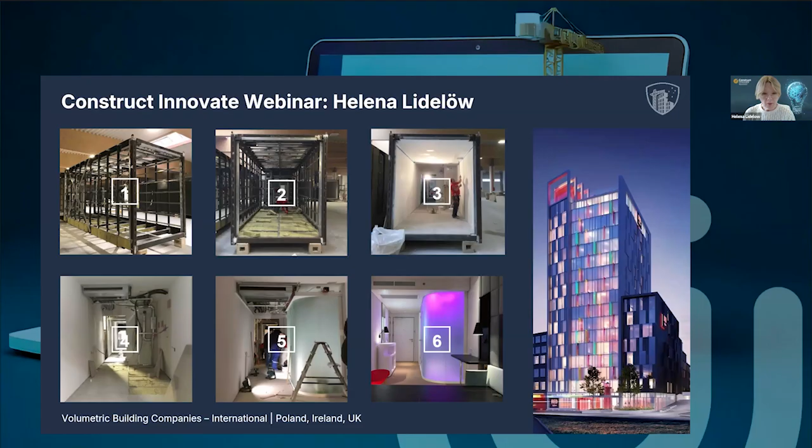Now, what we need to do here is to talk about how we move from our traditional way of thinking about construction and what challenges that poses for us.

So the first difference here is how we look at delivery. So we insert this factory piece into the equation and the delivery chain, and that does change the way you need to look at the supply chain from various standpoints.

So the first thing is that with modular approach and methods, you will have 40 to 50% faster site works. So that is glorious for most people because they want their project to arrive fast. But finances are the ones who struggle with this concept, given that you are producing a lot in a factory, but you're actually not producing that much on site. So where is the collateral? That is one of the biggest challenges we are discussing when we're closing projects.

On the client side, you get your building quicker, which means your return on investment here, depending on if you're hospitality, you get guests in your rooms quicker. If you are doing rental property, you get inhabitants coming into your building and starting paying rent quicker. So that means something on your balance sheet in the investment here. And that's one of the biggest arguments for modular: we're not selling cheaper, we're selling faster.

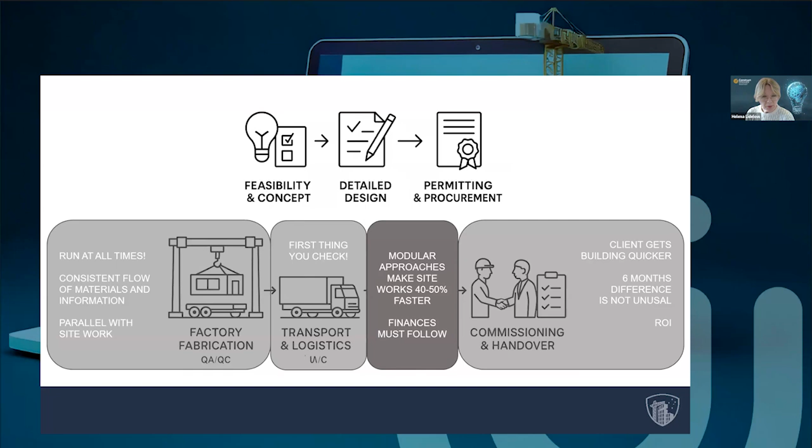Now, I have factories, two of them, and this is one of my pain points. I want it running at all times. The largest investment for a supplier is the factory itself, and if I can't feed it, that investment won't pay off. So sometimes when I speak to clients, I don't speak about one project - I speak about a series of projects so I can load my factory for a consistent flow.

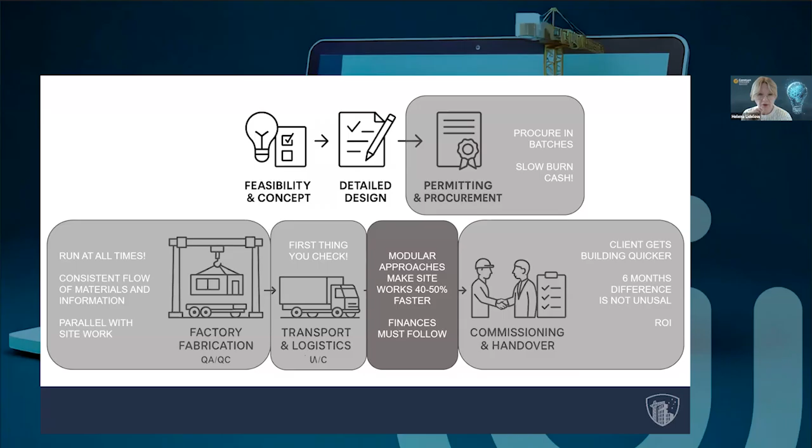For procurement, we don't want to overspend on the cash flow here. So we're procuring in batches and a slow cash burn throughout the project. This is something we have to align with our contracts and our clients.

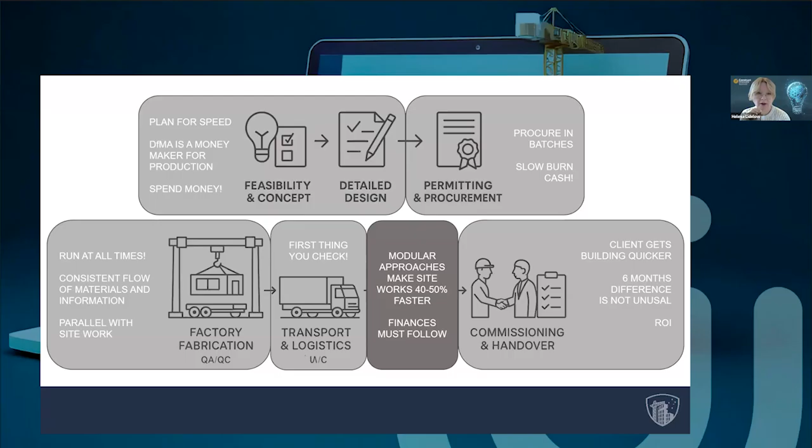And then the piece that's dear to my heart - I used to be a design manager before - the more time and effort you spend in design, the better all the rest downstream flows. So if there's anywhere in the process where you as an investor, or me as a supplier, should spend time and money, it's in that design process. An error propagates all the way through, and that's nothing we want to pay for.

If you're a client now and on this call, how can you prepare for engaging in the modular contract? Well, first of all, you need to understand the cash flow I just projected. We will take you through that discussion.

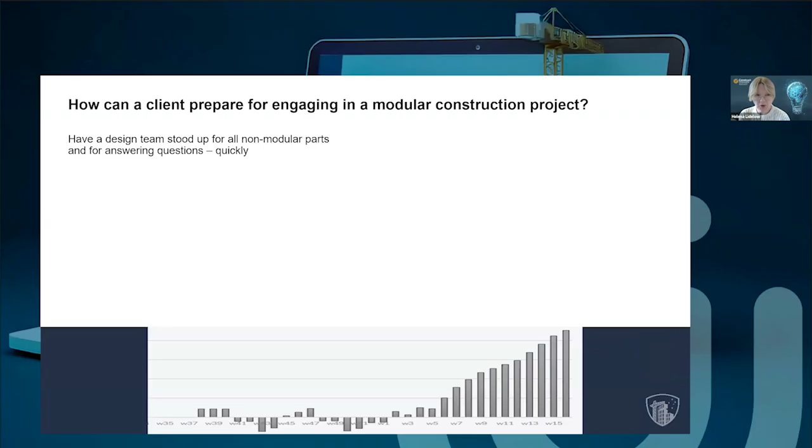You, on your side, as a client, will need to have a design team too, because modular is not the answer for everything. We typically don't do foundation works and roofs and so forth. So there are bits and pieces that need to be designed outside of the modular parts as well.

If you want this to go smoothly, you repeat yourselves as much as possible. Some people think that's boring. Some people think that's really efficient.

Let's have the discussion. The large ticket items for you will be the transportation and the site process. If it changes - if there are access problems or if you move the timeline - that's going to affect everything here.

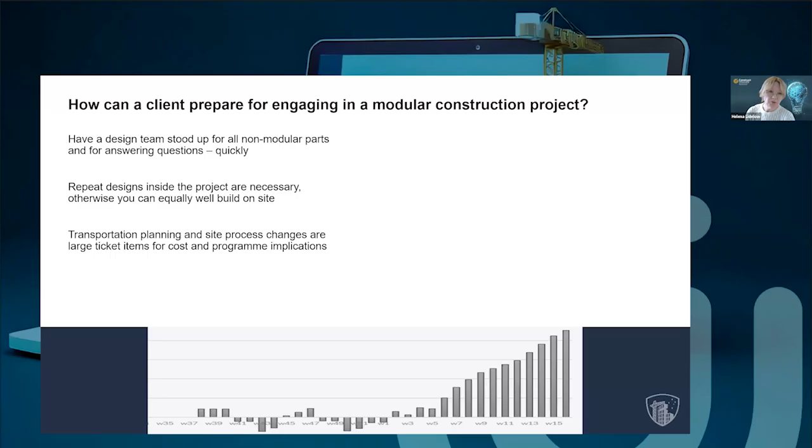Control of these and certainty around these will help you produce a modular project. Your 75% of your project can be tied up in the modular portion of it. This is a lot - so you're placing a lot of your budget in the hands of one supplier.

So we spend a fair bit of time discussing client-supplier relations and how we can ensure collateral for this.

Now, don't change your mind. During the project, you do not change your mind. You do not walk into the factory floor and say, I want to move the door. That's way behind on schedule, and the follow-on effect of you saying that is that I probably have to change out 200 modules now and move the door.

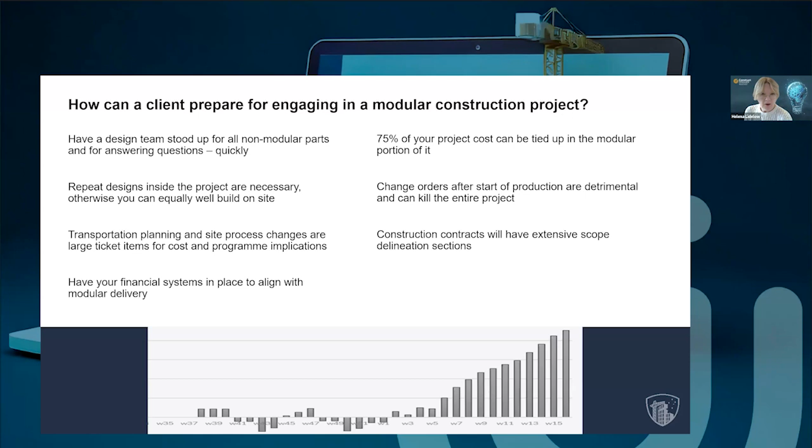So that will be a hard no, and that's why you should spend so much time upfront in design - it's for you to be sure that you're getting what you want. Now, this one on collateral we already discussed. Let me move on, because I have a tendency to talk way too much. It doesn't make sense all the time.

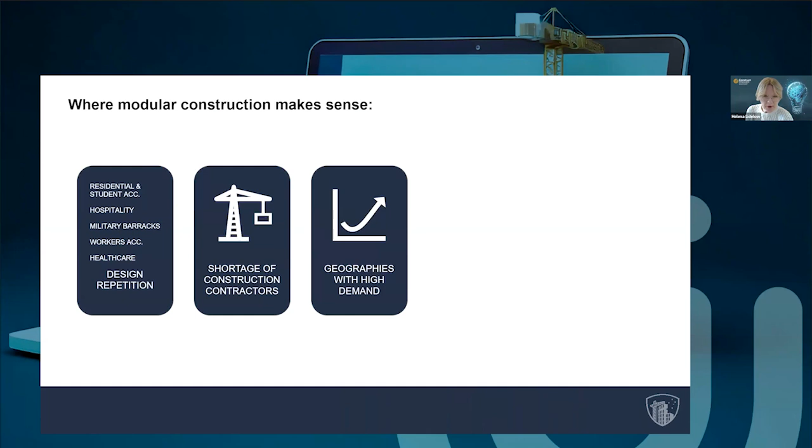So if we're looking at this from a sustainability standpoint, which we should for this seminar, this is not a one-size-fits-all solution, by no means. You should be looking for design repetition. You should be looking for areas where there are shortages of construction contractors, meaning you don't have much domestic supply. You should look at geographies with high demand, and you should look at where you have high labor rates. Labor rates in Poland are not as high as they are in other parts of Europe, so I have a delta there that I'm working with.

That's why we're here. And then locations with little supply overall. I have a fair amount of islands in my pipeline - islands in the Caribbean. I just told you Iceland. I have projects in Ireland as well, and we're working on islands outside the coast of Africa. They are perfect petri dishes for all that you see here on the screen.

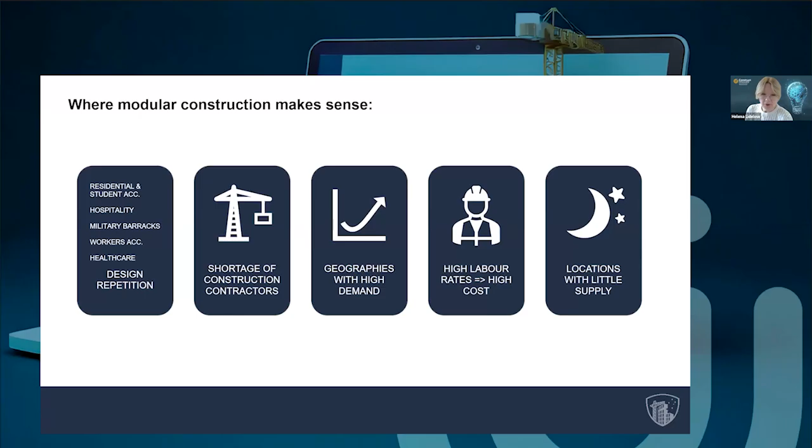But there are also countries who sign up for one or more of these conditions.

This is a question many ask: will modular construction become the norm in the future? Some people say everything should be modular. I've been in this industry for 25 years. I will say that's probably very unlikely that you're going to end up with that.

Modular construction has limitations. Not all construction designs can be modularized or should be modularized. From a sustainable society perspective, why would we want to do that? We also want concert halls, and we also want open spaces for schools and arenas. You don't want to modularize everything you see, but there are those structures that do make sense, and let's look at them.

Not everyone can invest in a factory either, and not everyone should, given the technology that we need to use them. Infrastructure as a sector - that's a large sector where it doesn't really work all that well with modular solutions, even though there are exceptions.

And we live in a world where 50% of everything that's done in Europe in construction is actually refurb, which means that's another challenge when you have to walk into existing structures and start work.

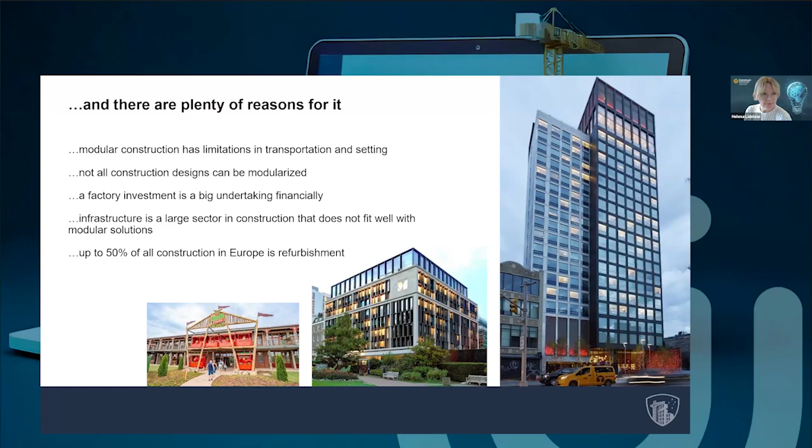Then we have the pros. What are the pushes for a modular solution?

Well, construction workers are not at hand and they are not increasing as a group worldwide. Digitalization will remove work tasks that used to depend on manual labor, but it also forces a good amount of definition into modular.

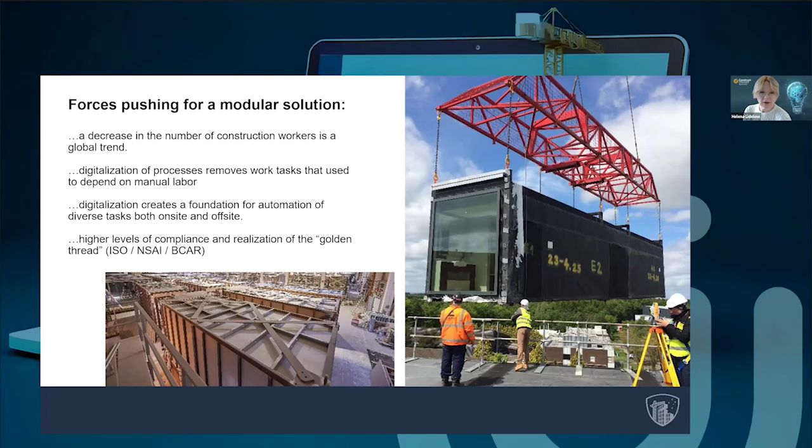The higher levels of compliance and realization of that golden thread sit really well with modular. The reason is that I, as a modular supplier, need to keep track of everything to make sure it ends up in the right place. And that happens to align very directly with what is said in standards like ISO 9001, for which I'm certified. That provides a lot of certainty for clients coming in to understand that I need that delivery system as much as they do.

There are, of course, some tricks of the trade, so let me share. And some of them are backwards. Spend that time in design. Don't rush, just don't do it. You have that money, it isn't all that much if you start looking at the overall project here. Make sure that you have the proper resources and the proper expertise in design.

Let's do a feasibility study. We offer this regularly to our clients, and make sure that the suppliers are telling you if this can get done and if it can be rejigged to a modular construction approach.

This one I would love for everyone to do: bring your insurance company and your bank with you early. Many project discussions have ended up with a no on certain details here, and you may have spent so much time and effort into the project that you're actually really disappointed when you end up with a no from these heavy institutions that need to back you and your project.

And then spend time on coordination here. We have wonderful BIM tools today, we have wonderful BIM managers today. We understand how to use digital technology to work with each other, and modular is one place where that pays off heavily. An error multiplies here, so let's make sure that we don't have them and that we see them early.

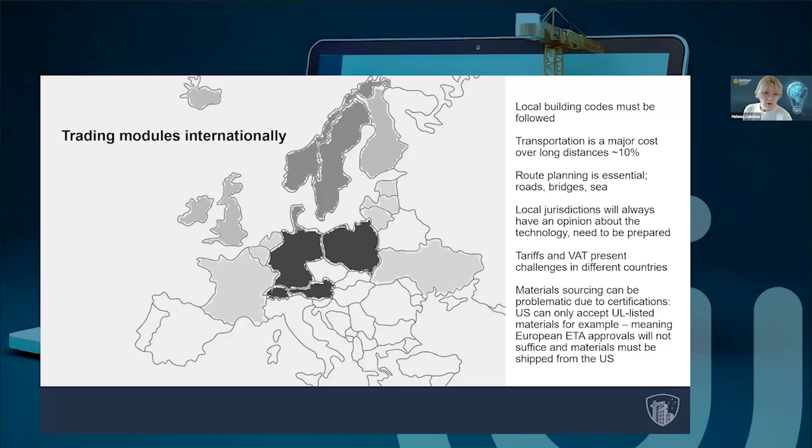Isn't it super counterproductive now to ship modules from a sustainability standpoint? This is one of the questions I get almost every project. You're just shipping air, doesn't make sense. So we have then made analysis on that.

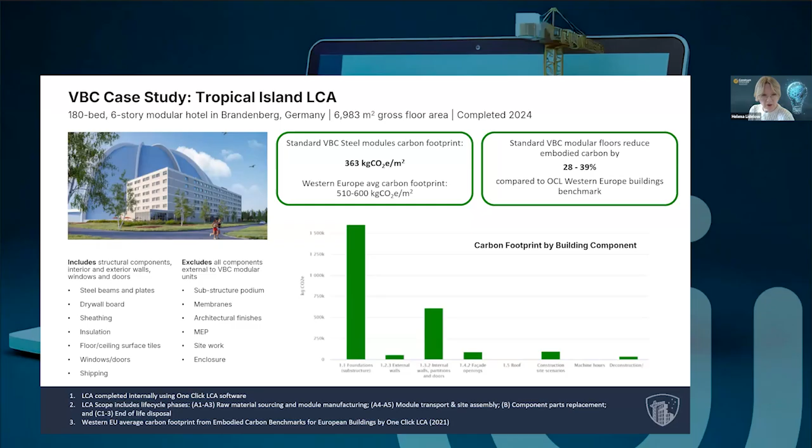I know this is probably shallow for some of you, but we have made a case study establishing the kilograms of carbon dioxide equivalent per square meter for our modules and compared that to the European standard project. We are then below by roughly 35%, I would say. This is a project that we produced in Germany, and we include all the transportation in the analysis. So all the diesel, all the back and forth with the materials to the factory first and with the modules to the site later is included in this carbon footprint analysis. It's important to understand that this framework we have here is really helpful, where you have the different stages of a life cycle included in that analysis, and it's set up for success and for comparisons.

Now, we are a company, VBC, who's also producing wood modules, and we do that over in the US. I only do steel here in the EU. So we compared internally as well, and of course, no surprise here, a wood modular project comes out at a much lower carbon footprint value than a steel module will do.

So I'm keeping tabs of a particular development in the northern part of Sweden and in other countries too. We are now establishing steel mills and furnaces that are not fueled by coal, but are driven by hydrogen. And that will change this whole carbon footprint discussion once they come online and have ramped up their production.

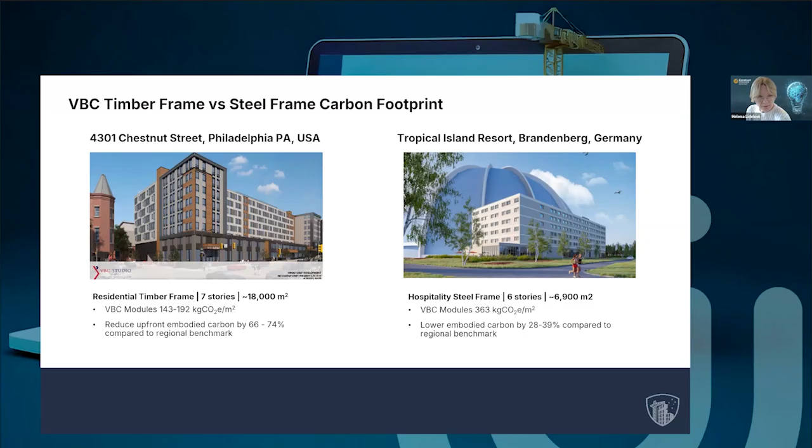Brilliant, Helena. That's a fantastic presentation, so much great advice for different stakeholders within this sector, even down to don't forget your banks and your insurance that a lot of people forget. In our last webinar of this series, we will have one of the major insurers on as well, giving a talk, so people will be able to challenge them and ask questions. It's also very interesting that you have set up in a country producing modules but are not delivering modules within that country. I'm sure there are lots of questions for you, and we'll pick up on some in the Q&A.

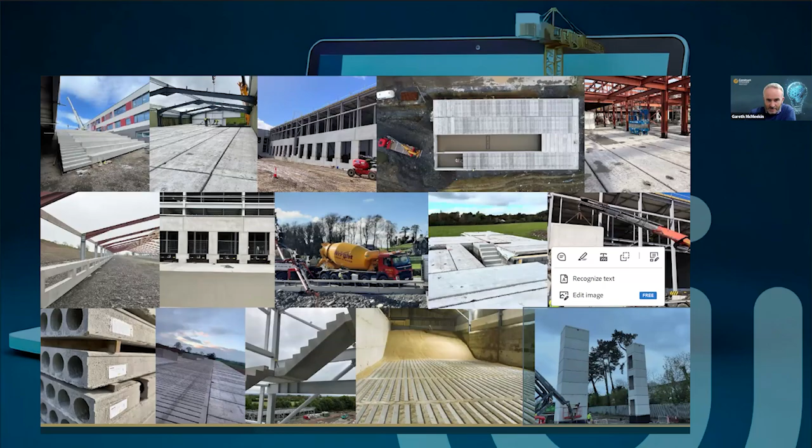Our history is 40 years of panelized production, everything from slats, walls, stairs, increasingly industrial buildings. We serve the residential, commercial and agri sectors throughout Ireland and the UK with our panelized production, and then the volumetric product, BuildWright, is a smaller part of the business, but growing particularly at the present time.

When we launched the BuildWright product, we're not big on vision statements and things like that, but we tried to summarize what we were doing, and our aim really is to make building simple through innovation and excellence. Hopefully, if you were to visit some of the things that we built, you would know a little bit about that.

So just a quick overview of the product. A lot of the work that we've done to date, we've been producing volumetric modules for about 6 years at this stage. A lot of that has gone to private one-off developments, and the reason for that is the difficulty in the buy cycle of larger projects. It's really only after 6 years of work, and only in the last 6 months, that we have started to see more of those multi-unit developments coming through.

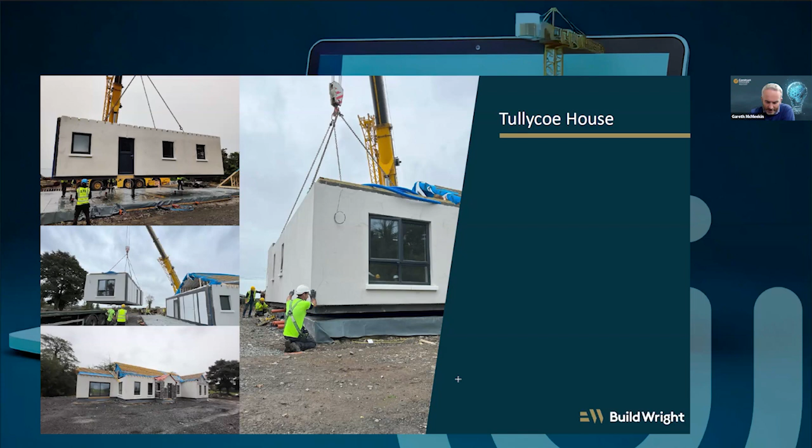Typical production cycle is on the order of seven weeks, with 7 stations in the factory, to move a module through from a completed design to ready to go to site, and then roughly the same time again on site. A lot of that time on site is largely about getting weather right for render finishes, and waits for service connections and that kind of thing.

The modules are transported, as you can see here, maybe not with beds and chairs in them, but with all the rest of the finishes in place, so that it's really just a case of joining up the gaps between the modules, and then connecting things like services and external renders.

So things like walls are painted, kitchens are in, bathrooms are in, flooring is down. So it's a pretty complete system. This was a slightly larger project where there were 12 apartments delivered to a hotel site. Each apartment was a 1-bedroom unit, self-contained, for weekend lets and that kind of thing.

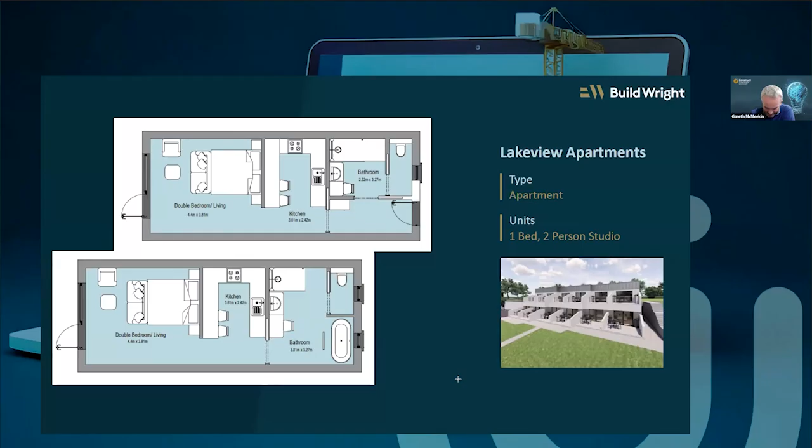As Helena mentioned, hotels find the early occupancy attractive, and so this was 12 units, 12 apartments delivered. From site works commenced until the units were occupied was about 12 weeks, so an exceptionally fast program, and it allowed both an early release of those things, plus it was an existing hotel site, and we were able to minimize the disruption that was caused.

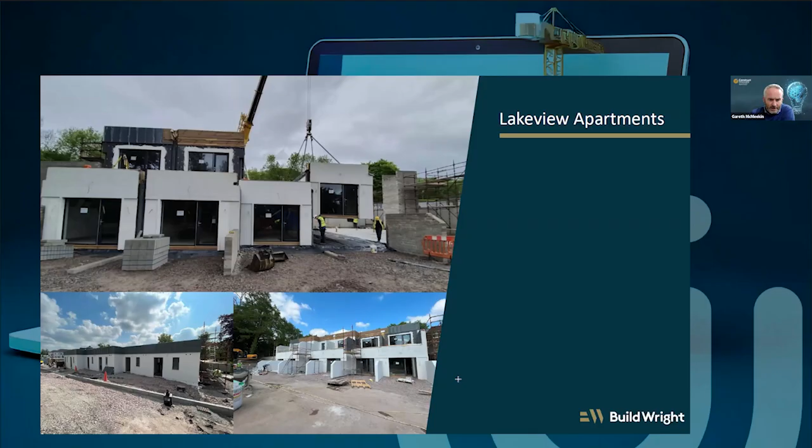The topic for today was really this idea to deliver sustainability at scale through 3D volumetric offsite construction. And I want to take 2 slants on answering that: why I do believe that there is an option to deliver sustainability at scale through this system, and then just briefly to look at how. And the reality is, I do believe we need to do things differently.

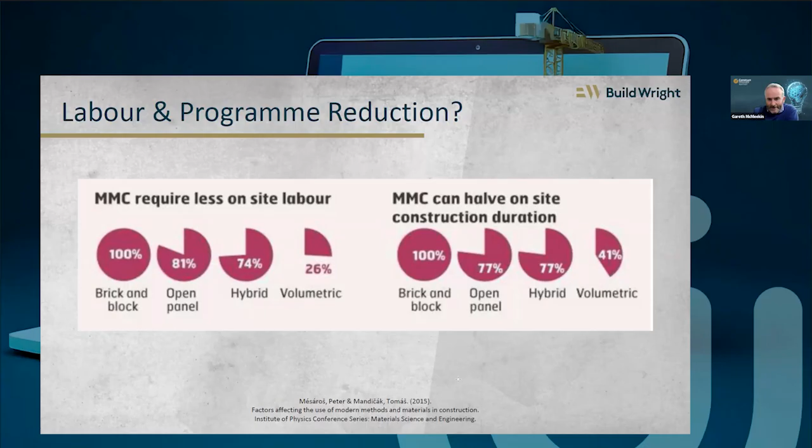It is absolutely the hardest way to do modular. It takes so much work to get it right, but it should be the place where we see the proper gains over the long term. And so why is it possible to deliver sustainability at scale using volumetric? I completely believe that it is. And as I started to think a wee bit about the how,

to frame it around something, this acronym came to mind, and I think it in itself speaks to the situation. How do we deliver sustainability at scale through 3D volumetric offsite solutions? We need to trust the systems that are there. And I don't mean blind trust with no science behind that. I'll explain it.

But one of the huge problems at the minute is a lack of trust in the systems. And so my trust acronym says that we need to test the system properly. We need to recognize it for what it is and what it's not. We need to use it and learn by doing. We need to scale that, and then we need to continually tune the modular offering.

As a company, we're rooted in the concrete trade, and so the first test that we applied before we ever began modular production was the customer test, and people want to live in a concrete home. Apart from any other arguments, the people who invest their money, far and away the majority, want that resilience that they've learned in concrete. And so we understand we won't supply every need in the market, but that idea is tested by our customers.

And then to say a word about Agrément certification. I hope that most people are familiar with what it is, although I think there's an assumption that people know what Agrément certification is. For me, it was a 4-year ordeal to try and get the system certified. It is no small matter.

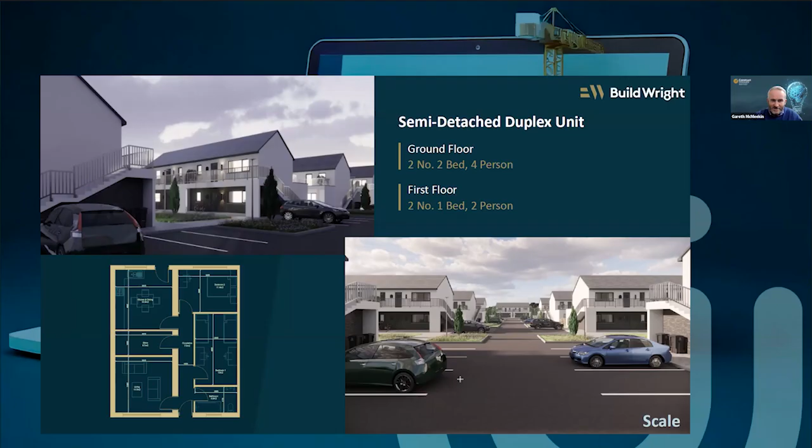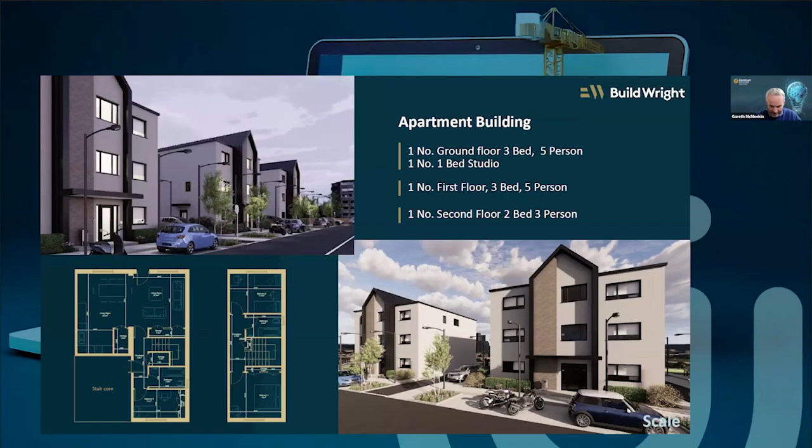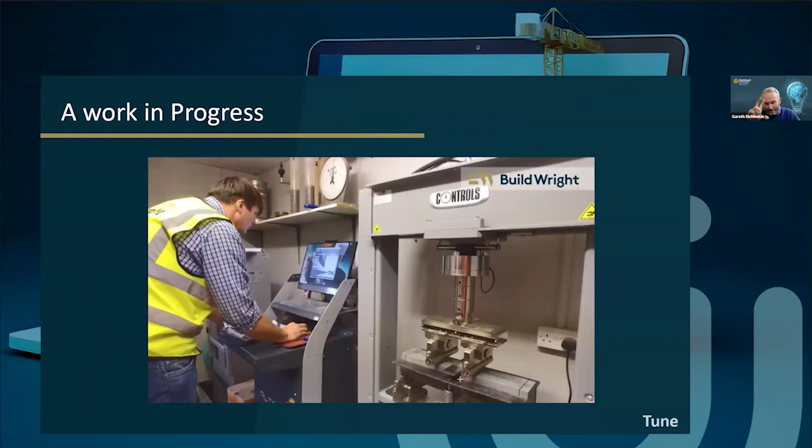The problem with certification, and certification is great, is it makes you freeze development. And if we are going to get the sustainability benefits out of these things, we need to go back around again and again and again and innovate to reduce carbon footprint, to reduce wastage, to make things more efficient. And we need to understand volumetric as a system that continually gets tuned.

So that's kind of my conclusions. That's my recommendation. We do need to learn to trust the system. That's based on thorough testing, recognizing what it is, learning by doing and the use of the system, and scale. Helena already talked about the absolute need to keep factories full, because so many of the modular businesses are running on enthusiasm at the minute, and that won't last forever. They need scale, and they need projects through the pipeline in order to make them work, and then we tune it.

So that's, I don't know how long I've taken, but that's a rapid fire tour of kind of what we do and the 3D volumetric concrete offering.

Brilliant, Gareth. Perfectly on time. Well done, and really great presentation. A long journey for you guys, 6 years or so to get there, 4 years to be certified. But also great to hear the value you see out of going through the certification, and that, I suppose, helping with the trust part of it. That if you have gone through an Agrément certification for a system like your own, that means that it has been a very robust system, that your analysis or review that you've gone through to get there.

I also like that use of TRUST for test, recognition, use, scale, tune in. That's really, really neat. I think that covers a lot of things there. And great to hear the why, which obviously has come up several times for people, but that how to do it and how to scale it up. So lots of great stuff in there.

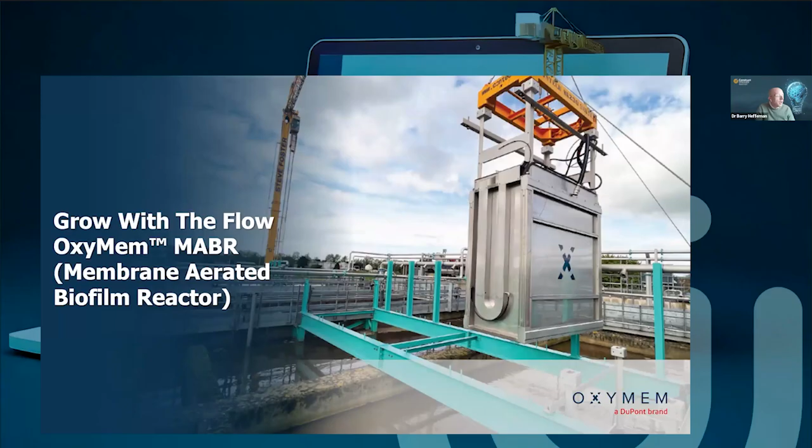Before I do that, I'll just give you a little bit of background on OxyMem and its journey. OxyMem is an Irish company. It's not very old. It was only founded in 2013. Before that, the membrane-aerated biofilm reactor was just a concept that existed in the lab. And I'm showing the OxyMem journey here, so we can see the lab years there. That's a picture of a lab reactor I had when I was doing my PhD in UCD, when this was just an idea, and it is indeed a 50 milliliter syringe that you're looking at. So back in those days, I didn't think I'd be sitting here today talking to you about a modular MABR solution.

The company was founded in 2013 when Wayne Byrne, our founder and CEO, met with Enterprise Ireland and Eoin Casey, my PhD supervisor. And then we had a couple of years where we were trying to figure out what to do with an MABR. We went through an IDC stage. We thought we could be a package plant solution, but that really didn't work for the municipal wastewater treatment market. That's primarily because the vast majority of wastewater treatment plants exist already today.

The activated sludge process, the main process that's used to treat wastewater, has been around since 1914. So in Europe, North America, and vast swaths of the planet, most wastewater treatment plants exist. And their challenge is how to do more in those wastewater treatment plants, not to build new ones. So then in 2020, we pivoted from trying to make these modular, let's say, volumetric package plants to see how we can use our product to drop into wastewater treatment plants and take advantage of all that embedded carbon that's in the concrete, in the ground already. So that's a little bit on the background of where OxyMem comes from.

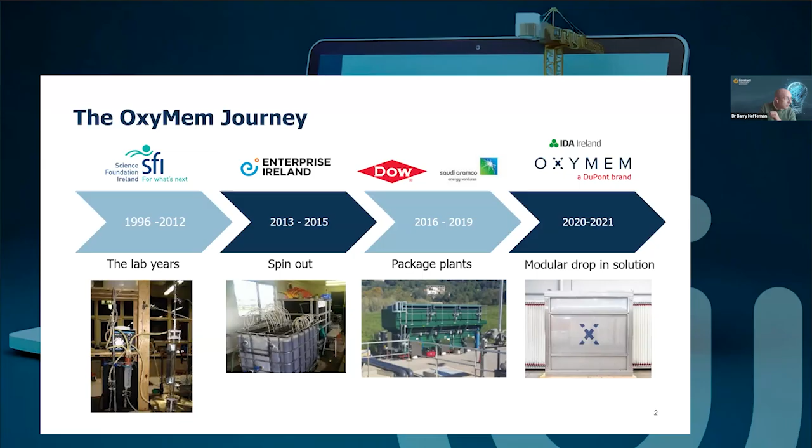So one of the key advantages of the MABR is we can drop into existing wastewater treatment plants without taking them offline. It means that the upgrades can be very fast. On top of that, we have an added advantage of really low energy usage.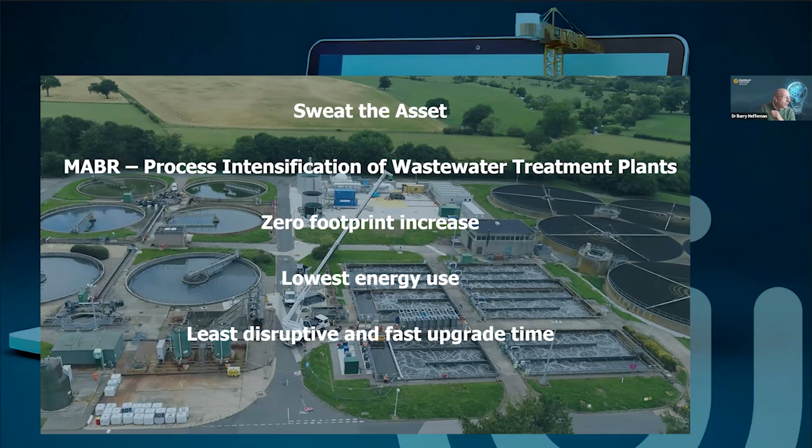In wastewater, you need two things to clean it: oxygen and bacteria. The MABR serves both functions. The bacteria grow on the membrane, and we supply oxygen from inside these fibers, which diffuses out directly to the bacteria growing on the membrane, which then treat the water.

Versus conventional technologies, one key advantage we have is that the oxygen is being transferred directly to the bacteria. Normally, wastewater treatment plants use bubbles, which you could see a little of in the previous slide, that turbulence at the top of the water. But the transfer of oxygen from a bubble is very inefficient; it depends on how big the bubble is and how high the water volume is. In this case, we don't have to worry about that because we're transferring the oxygen directly to the bacteria. So we can use less air at lower pressures, which means we use a lot less energy.

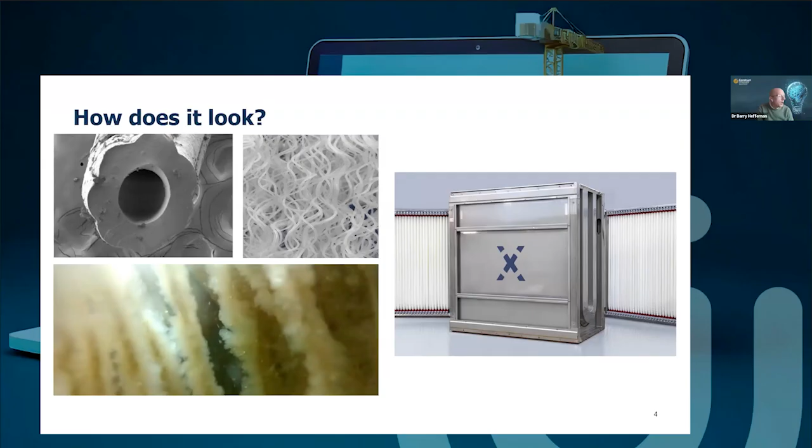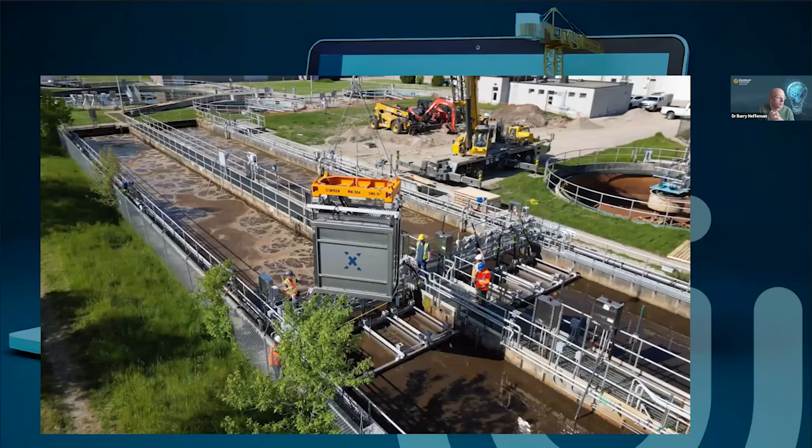In terms of how we do upgrades, I have a short video here, hopefully it will play. This is a plant in Canada, and it shows how quickly and easily we can upgrade the plants. We manufactured the modules in Ireland and shipped them to Canada. All of the steel work was fabricated offsite and then installed, and then we dropped in 8 of these modules in about 2 hours and upgraded the plant really, really quickly.

But to move on, I'll take a step back and describe the challenges the wastewater treatment industry is facing, then a little bit of the science behind it, and then I'll show some case studies for how OxyMem's MABR can solve that.

I'm lucky enough to meet with a lot of owners and operators of wastewater treatment plants, and they tell you their problems, which is always a gift for any manufacturing company. If you know what a customer's challenge is, you can potentially help solve it. Possibly the biggest challenge for the wastewater industry is aging infrastructure. Many plants were built back in the 50s, 60s, 70s, when standards were lower and the population was smaller. So right now, those wastewater treatment plants can't necessarily handle all the flow that's going to come to them, or they can't handle the new effluent limits they're going to get.

On top of that, energy is always a concern. It's one of the main operating costs, the energy for operating the fine bubble diffusers. Emissions are increasingly becoming a concern, less so the emissions associated with producing energy to power the blowers, as grids go green that's less of a concern, and more so with the process emissions.

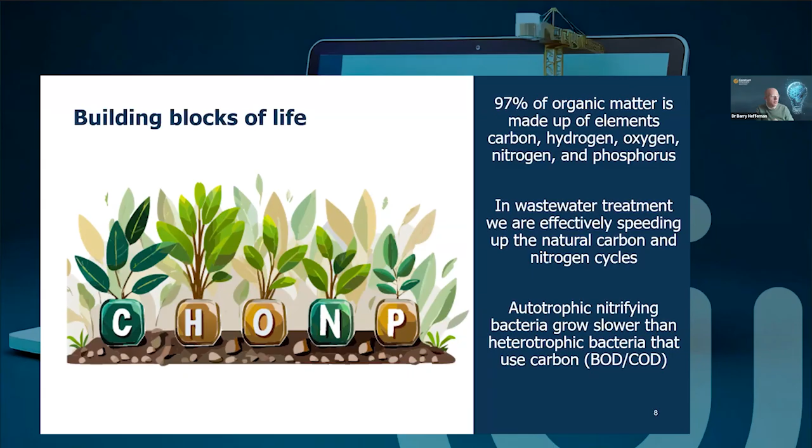So basically, whenever you're trying to treat more flow or get a better effluent quality in a wastewater treatment plant, you're always worried about the bacteria that remove nitrogen. They're called nitrifiers. So if a wastewater treatment plant fails, it'll fail most of the time because you're washing out the nitrifiers. So what do I mean by washout?

Basically, the bacteria double in a certain amount of time. Typically for nitrifiers, it could be 5-6 days, a doubling time, depending on the temperature.

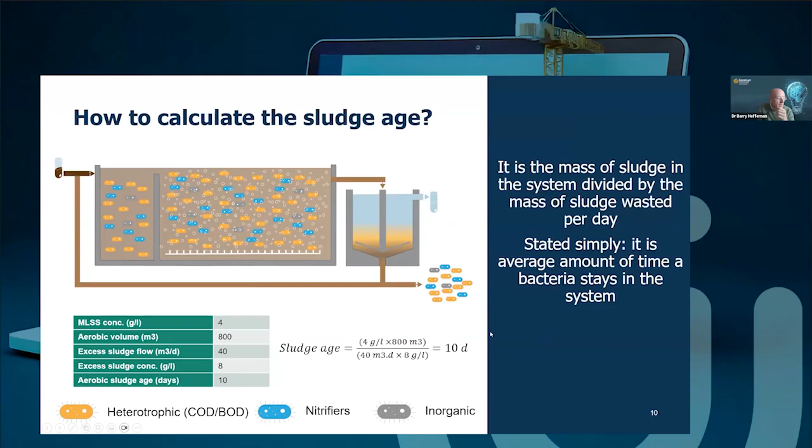The sludge age basically measures the average time the bacteria stay in the system, and it's a pretty easy calculation. It's the mass of nitrifiers in your tank divided by the mass of nitrifiers that are washed out in the excess sludge. And if you have a sludge age of 10 days, typically you're okay, and if you're less than that, you may need to be concerned. If anyone is more interested in that, I can discuss it offline.

I'll just go a little bit fast through it today for the time limit. But this example shows what happens when you have to treat 50% more flow in a wastewater treatment plant. The SRT, that's the sludge age, the amount of time the bacteria stay in the system, went from 6 days down to about 3.5 days.

But if we take a look at the effluent BOD, that's a measure of carbon in the effluent, there's almost no change - it hasn't had any impact at all. But if we look at the ammonia concentration, it's gone from being really low up to 12 milligrams per liter. This is really high for ammonia concentration, so the plant is not performing anymore, and that's because the nitrifiers are getting washed out of the system. So we need to do something about that.

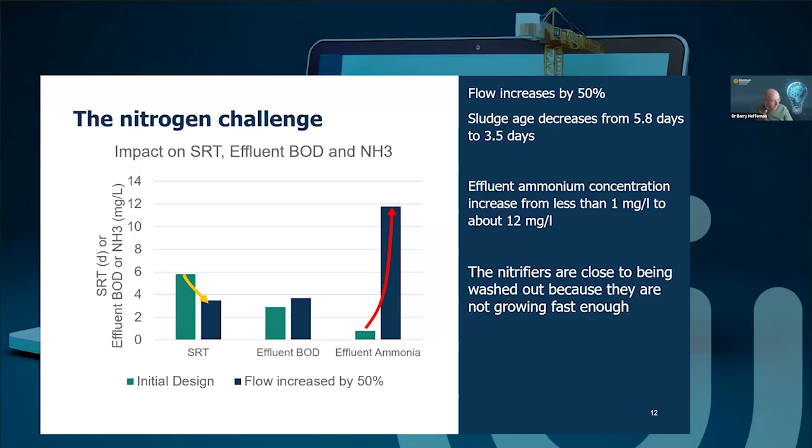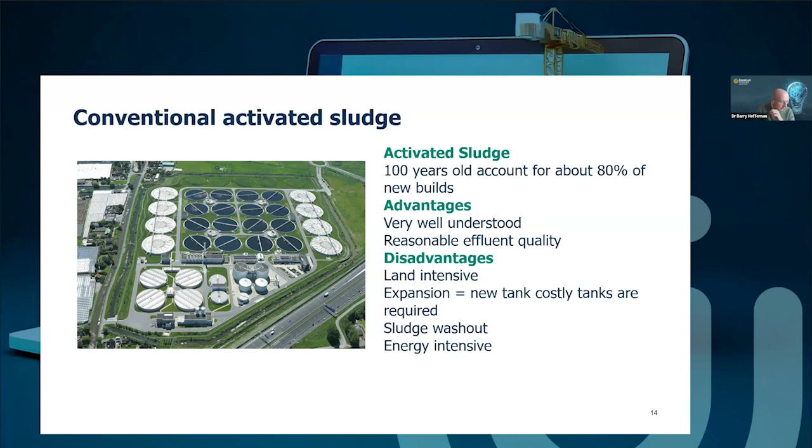The advantage is they've been around for 100 years, and they're well understood. So the industry tends to have a habit of just doing what you know, again and again. But there's a huge amount of on-site work that needs to be done with it, civil works, but to be fair to it, the technology works.

About 40 years ago, this technology called a moving bed biofilm reactor was developed. It's also a biofilm system like what OxyMem does. The difference is they've got these small little carriers, these chips, and the bacteria grows in them. You can dump them into a wastewater treatment plant, but you can't just dump them in.

Most wastewater treatment plants are long, narrow channels, similar to what I showed in the first video. And if you just dump those carriers in there, they're all going to end up at the latter end of the tank, and they don't work.

So you actually have to empty the tanks, put in all of these partitions, and put in these sieves, which maintain the carriers in their zone. And once you do that, you also need to increase your energy use compared to before the carriers went in, because you need energy to keep them in suspension.

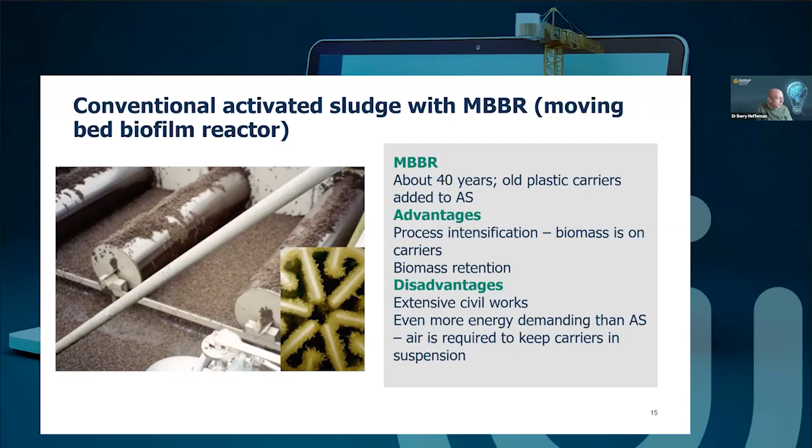So it's not modular construction yet. You have to do physical work on site, and you're going to use more energy to upgrade the plant. And then the third system is what they call membrane bioreactor.

Instead of using the settlers, those big circular tanks I showed previously, you can use these membranes, ultrafiltration membranes. They can be very compact, into a small tank like this. And they allow you to have a lot more biomass in the system, and biomass is what you need to treat the wastewater.

The negative things about these is that there's even more energy requirements than a moving bed biofilm reactor. You have to aerate the fibers really aggressively to stop them fouling. And it's also not something you can necessarily drop into the existing structure—you need to make a membrane tank.

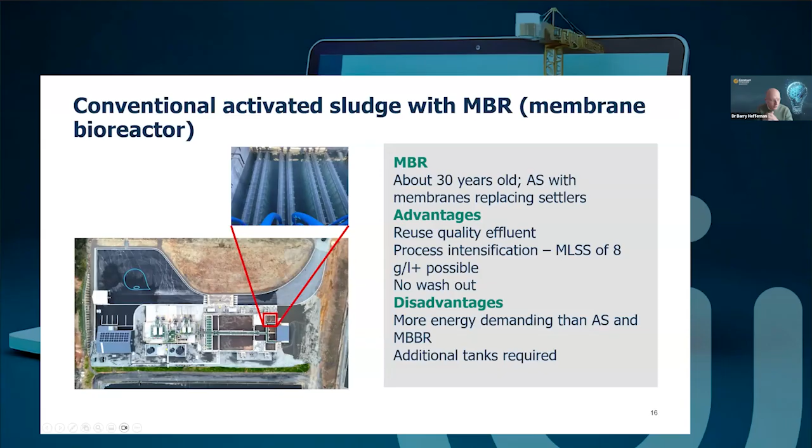Again, they work, but they are quite energy intensive. So then the alternative is we use an MABR, and the MABR specifically provides nitrifiers. So I'll do a little bit of science behind that.

So what the MABR does is it gives you the exact bacteria you need to upgrade the plant when conditions become challenging, when you're trying to treat more flow load or achieve a better effluent quality.

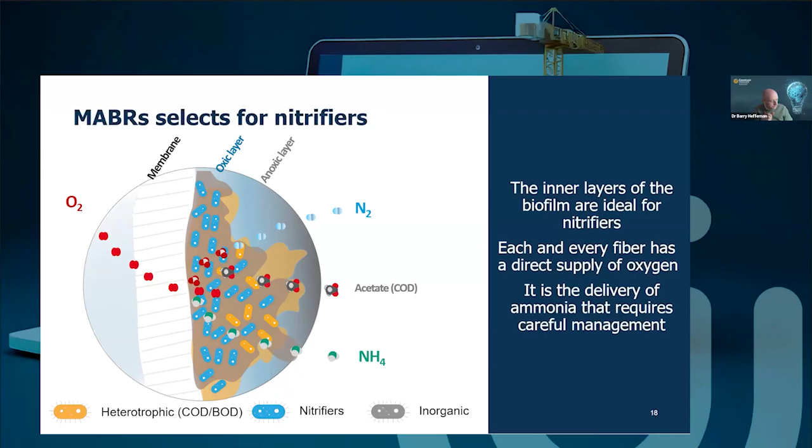So then just some examples of how it works on projects. We have projects all over the world, but the two I'll show are from the UK. They're relatively large installations, and there were some interesting mechanical works we had to do to make it work.

So this plant is called Monkmoor. It's in the UK, and it was started up in 2024. Their challenge was they were getting more flow because the population was increasing from about 116,000 people equivalent to 146,000. Plus, they got a new total phosphorus limit.

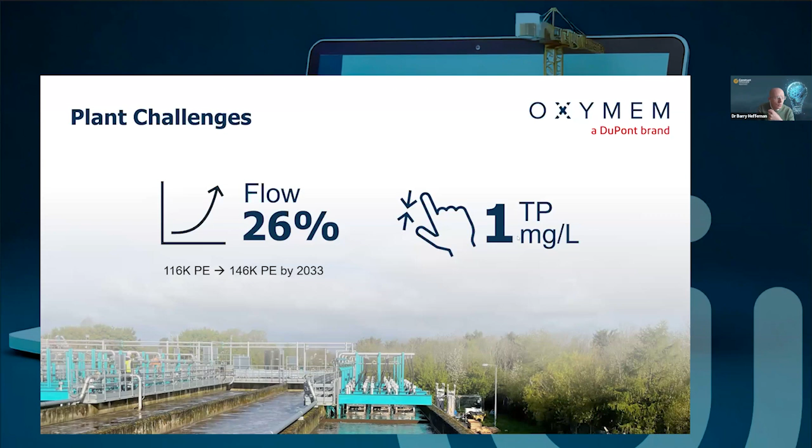In order to solve those two challenges, Severn Trent, the operator of the plant, decided to decrease the operating sludge concentration. It means there's less pressure on the settlers so they can handle more flow. And then they added iron chloride into the aeration tanks to precipitate out the phosphorus, which means they have more sludge production. What those two things mean, to get to the end of the story, is that your sludge age goes down. And when your sludge age goes down, you're putting your nitrifiers at risk.

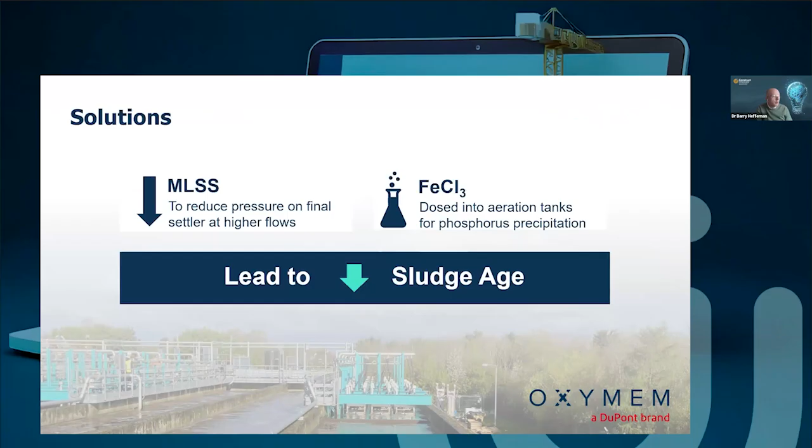So their solution was to drop in 48 of our OxyFAS modules to treat 162 kilograms of ammonia per day. These are the modules here on site. The modules were fabricated in Ireland, and the steelworks were fabricated off-site in the UK.

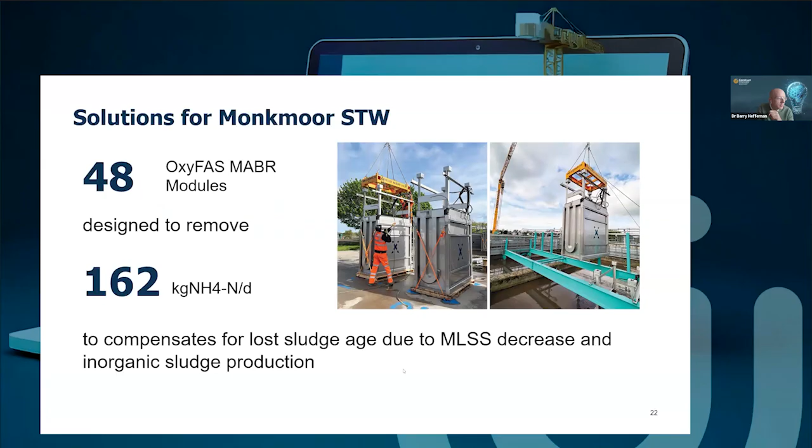And there was some clever engineering to manage to do this upgrade without taking the plant offline. I'll show them in the next slides. And this just shows one module getting installed.

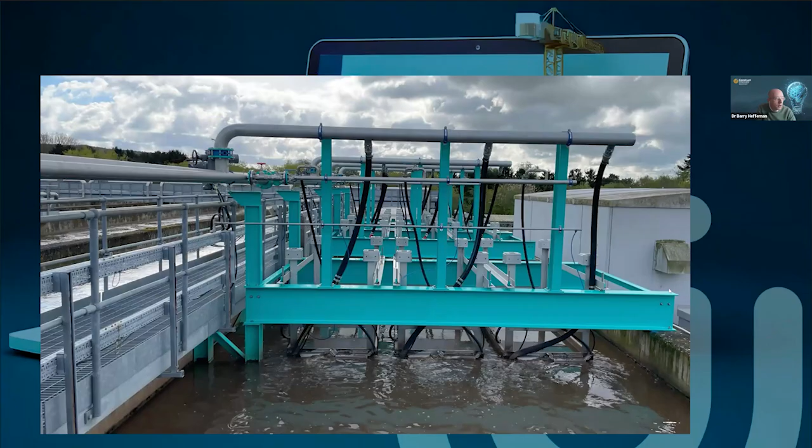So instead, we made this piece of steel that was cantilevered, able to slot underneath the walkway, and then drop in these steels to support the MABR modules without ever taking the plant offline. So you can kind of see some of the design work here.

This is the walkway, and this is that cantilever structure I'm talking about, which slotted underneath. And this is the steel where the MABR modules sit on.

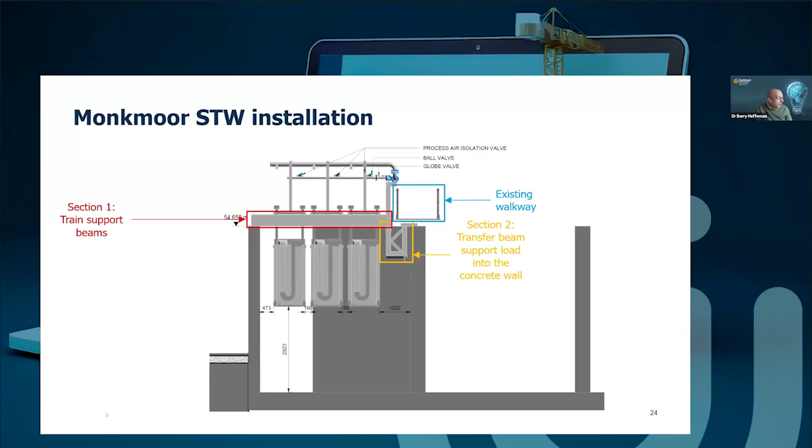I've decided not to show you the performance of the plant. It has worked. We've removed more ammonia than we needed, and they're getting good effluent quality. If anyone's really interested, they can connect with me and we can go through in more detail.

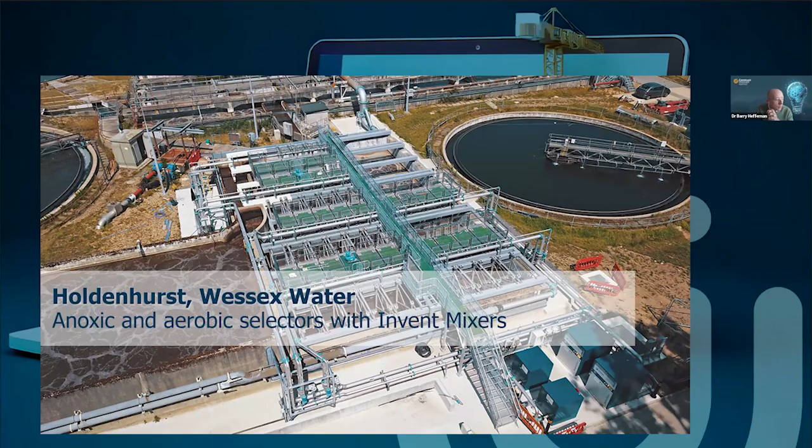Then one more case study. This is with Holdenhurst with Wessex Water in the UK. Their challenge was again somehow similar to that of Monkmoor. They had to treat more load, chemical oxygen demand, carbon and ammonia. And land was a real issue here.

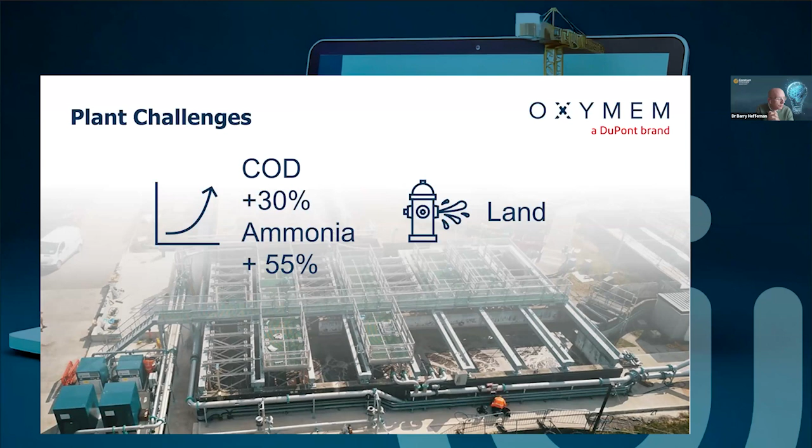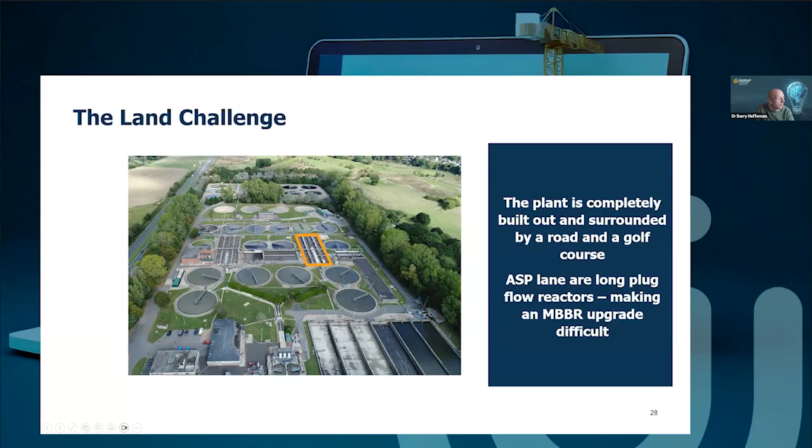This is the Holdenhurst plant, and it's completely built out and surrounded. You can see there's a road here, and over here there's a golf course. These are their existing activated sludge lanes. They're not appropriate to drop in those MBBR carriers I mentioned earlier on because they're long, narrow channels, really, really difficult to do an upgrade.

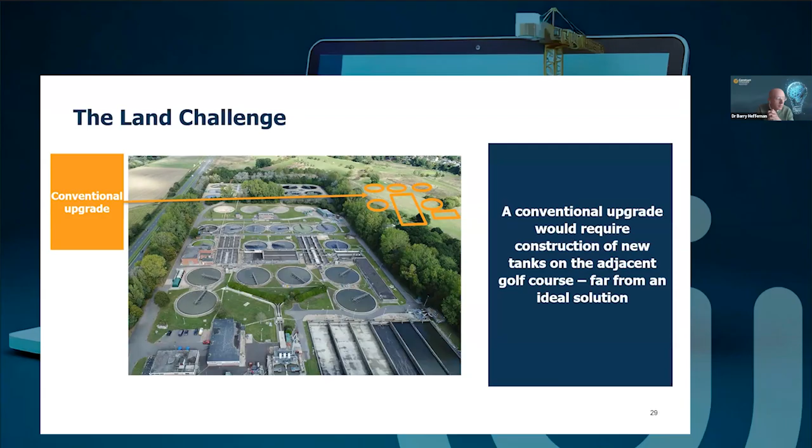If we take a look at it, the conventional approach would have been to buy land from the golf course and construct more aeration lanes and more settlers. But that obviously is far from an ideal solution. The local golfers don't want to lose their golf course, and the wastewater treatment plant doesn't want to pour more concrete if they can avoid it.

So instead, the solution was to drop the MABR modules into these existing tanks to upgrade the facility. Again, their main challenge was they had to reduce the MLSS, so sludge was going down. We installed 50 OxyFAS modules. This is the module here.

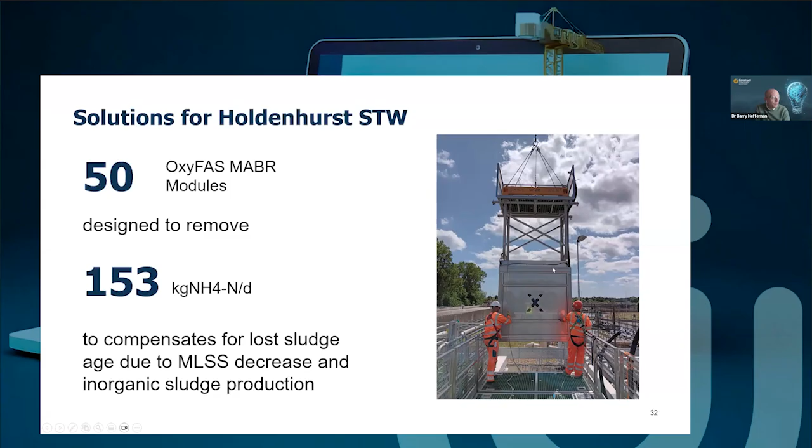On this particular site, the Monkmoor site, they didn't have walkways on top of the modules. They were able to use the man basket to make the connections. In this case, the client would prefer to have walkways on top of the modules. So we had to engineer this solution where we literally built in walkways on top of the hangers that we used to install our modules, so that you could connect all of the piping.

This just shows some images of the construction, so you can see the walkways and access on top of the modules. This plant has also started up, and we just passed our performance test a couple of weeks ago.

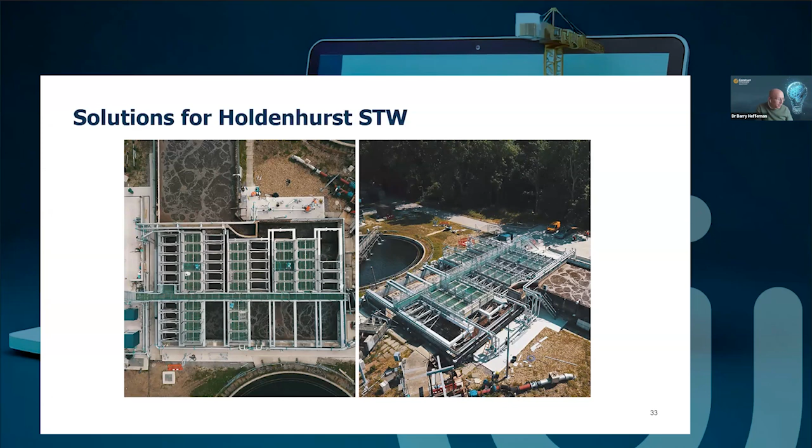And I guess the other thing is that we can also do incremental capacity increase. So we can help end users only treat the additional load that they have, whereas maybe in the past, if they were building new wastewater treatment plants, they maybe over-designed the plants and put in more flow, put in more tank volume than they actually required. So that's it, and thank you for your attention.

Thanks, Barry. Fantastic to see that. I suppose we have invested a lot of time and money into these plants, and by taking this modular technology and implementing them, we can actually get more out of our plants.

And obviously lots of our towns and cities in Ireland, the UK, and further afield are limited in terms of how much building we can do, how many more buildings, schools, industry that we can put in there because of the capacity of wastewater treatment systems.

If we can operate our systems more effectively and more efficiently, either by retrofitting them like through your system, or by operating them slightly differently, then obviously that opens up potential for our towns and villages to grow using existing systems, which are a far more sustainable, far more cost-effective way of doing things.